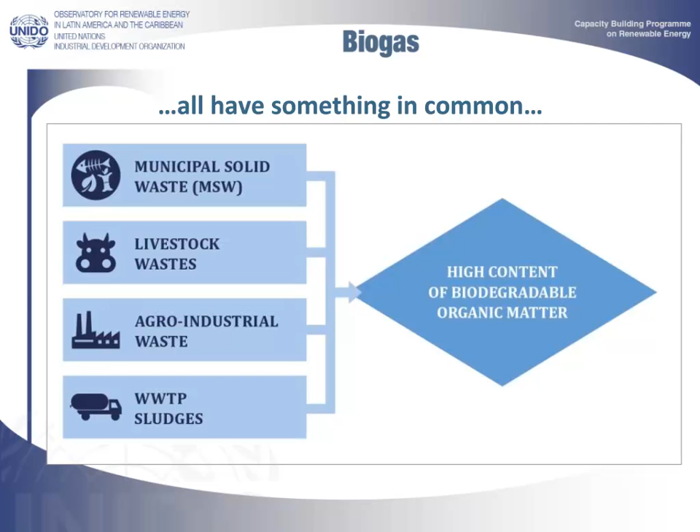The treatment of these wastes is accompanied by unavoidable costs, because there are regulations to be complied with. However, if the waste is treated considering criteria of minimizing energy consumption, energy production, nutrient use, and a reduction of greenhouse gas emissions, anaerobic treatment becomes very attractive.

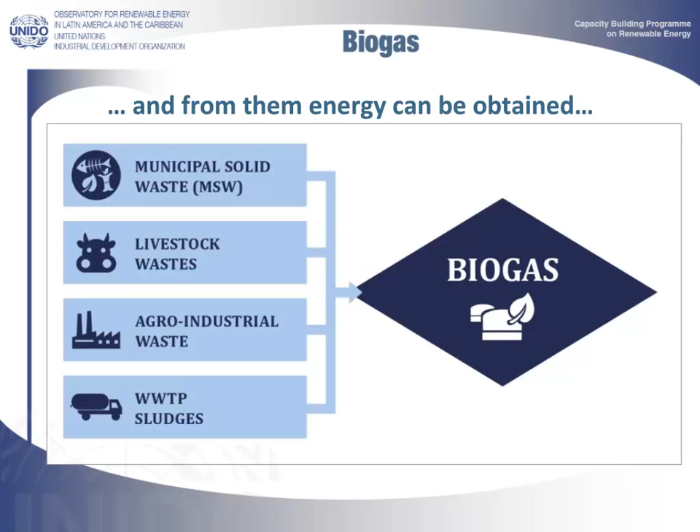The high concentration of organic matter in waste makes them highly suitable for use as feedstock in anaerobic processes for biogas production. Of course, the waste must be suitably managed, and there are well-known problems associated with this when wastes are not treated properly. There is also growing awareness that environmental precautions are essential for the future of our planet

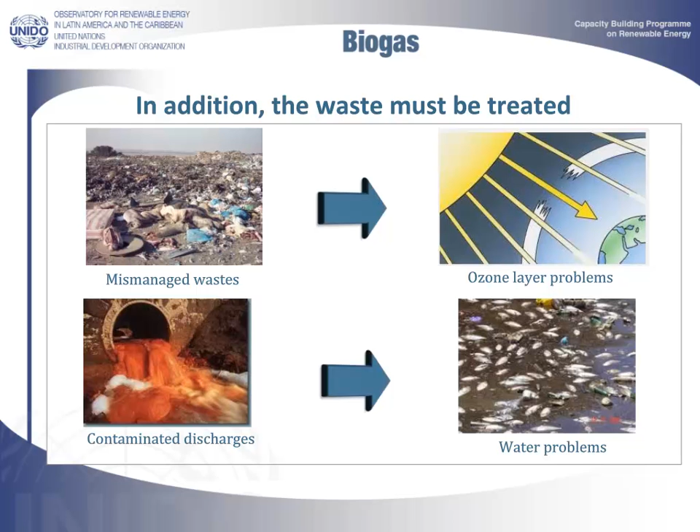and continued economic development. We now have technology that is able to decontaminate waste and at the same time produce energy. This is known as anaerobic digestion.

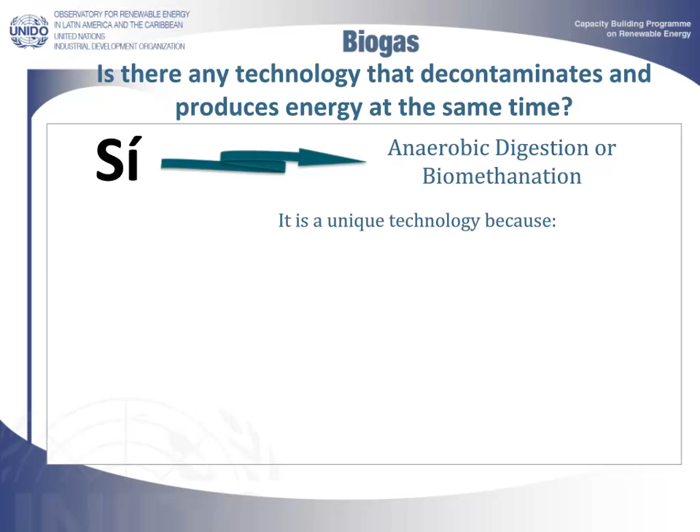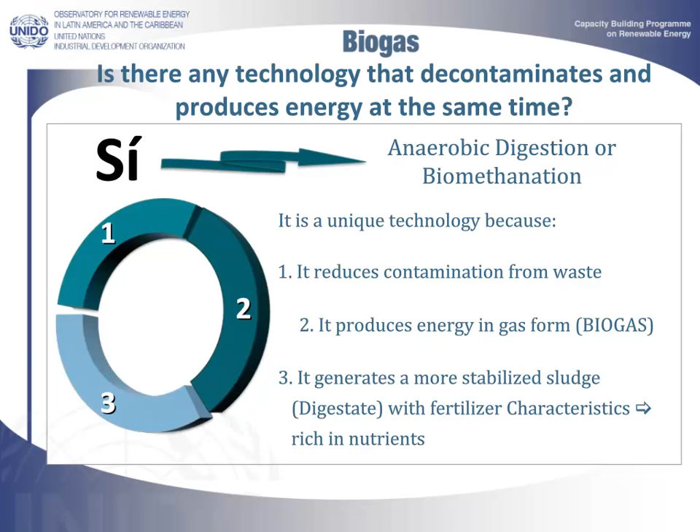Environmental aspects and the need for renewable energy have led this technology to be of huge interest in both developed and developing countries, since it offers both possibilities and solutions to global issues, such as safe, controlled waste management, energy production, and other collateral benefits.

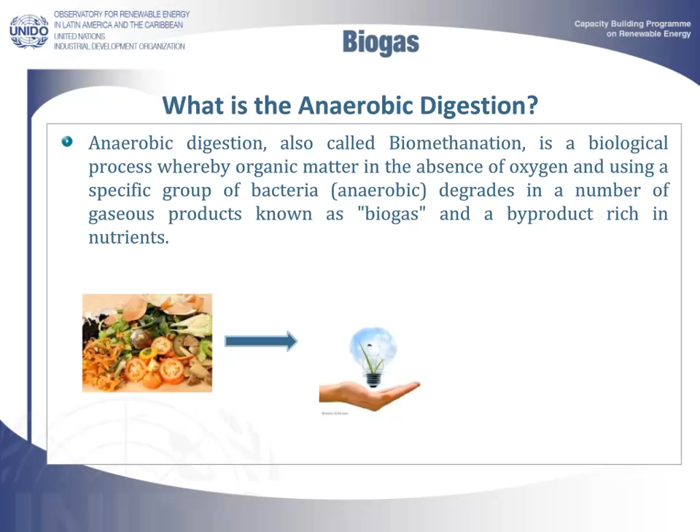Anaerobic digestion is a biological process in which a group of specific bacteria, anaerobic bacteria, transform organic matter into biogas and a nutrient-rich product known as a digestate, or biol, in some countries of Latin America and the Caribbean.

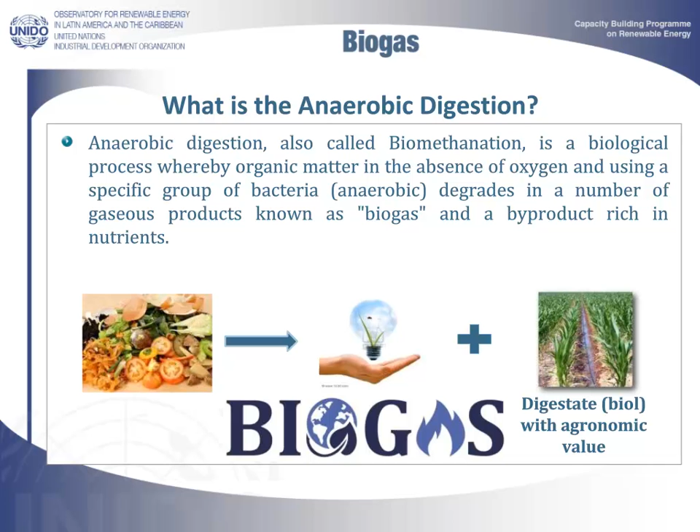There are different strategies for managing this digestate, and the appropriateness of one or the other will be governed by the characteristics of the environment, the objectives, and the scale of treatment.

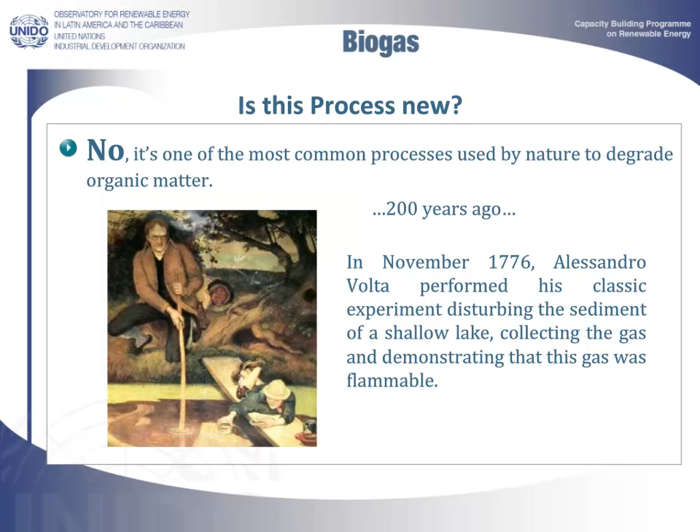Some authors have attributed the first scientific reference to biogas in 1630 to Jan Baptista van Helmont, who stated that a flammable gas could be obtained from the decomposition of organic matter. The scientific interest for energy purposes dates from 1776, when Alessandro Volta identified the relationship between organic matter decomposition in an anaerobic environment and the generation of a combustible gas.

Over the years, many researchers, among which are some of the most famous scientists in the world, have advanced our knowledge of the process, but it was only since the mid-20th century that more progress has been made, and today many of the reactions involved are now well known.

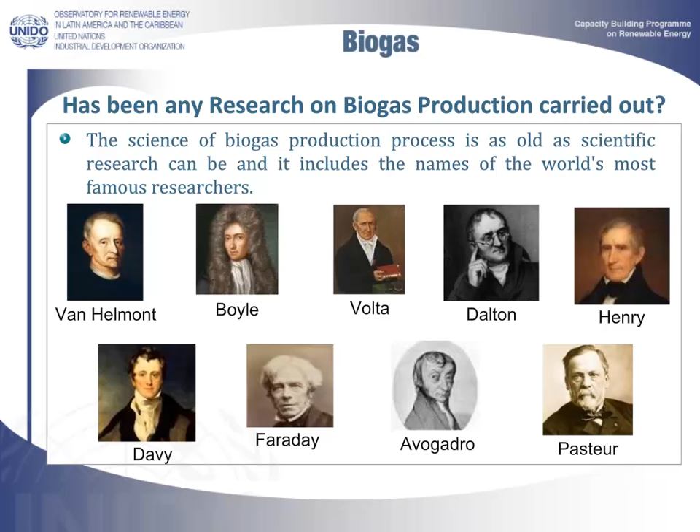Throughout history, there have been many events related to the evolution of research into biogas. In 1930, for example, with the discovery of anaerobic bacteria, there came the academic and scientific recognition of anaerobic digestion. However, subsequently, this interest began to wane owing to the increasing consumption of fossil fuels. It was from the oil crisis of 1973 when interest resurfaced.

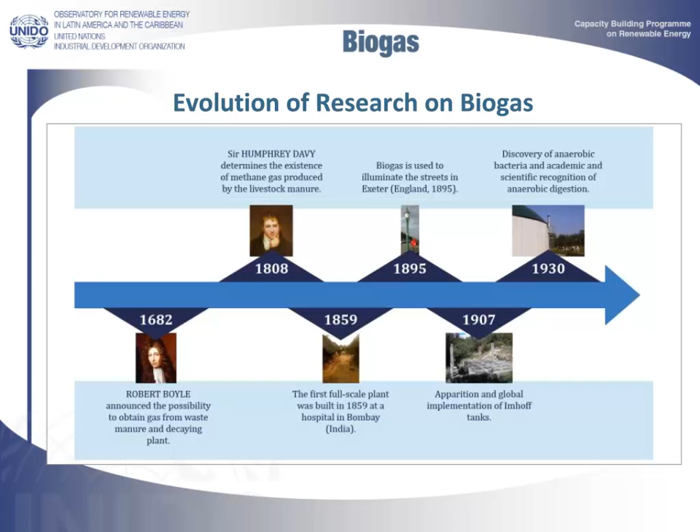Research and development programs were promoted and industrial plants were built. There are many reasons that justify biomethanation, among them energy production, scarce and strategically very important resources, and the great potential of biodegradable organic waste in the region of Latin America and the Caribbean. As I have mentioned, this is a markedly agro-industrial and livestock-oriented region.

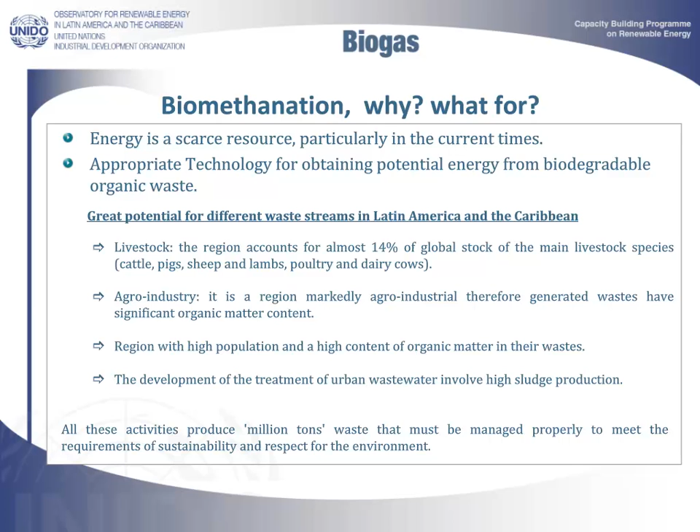All these activities generate millions of tons of waste that could be used to provide energy and at the same time meet the requirements of sustainability and environmental friendliness. Another fact to note is that biogas is a renewable source of energy and thus provides greater supply security. Its use also reduces emissions, contributing to the reduction of greenhouse gas emissions by avoiding methane. Finally, of course, it is a source of employment.

Biogas also provides greater energy and economic independence. The rising costs and limited availability of non-renewable energy sources, combined with the difficulty of distribution in rural areas, make the application of this technology particularly appropriate in these communities. Moreover, nationwide, it can help reduce the import of other energy sources.

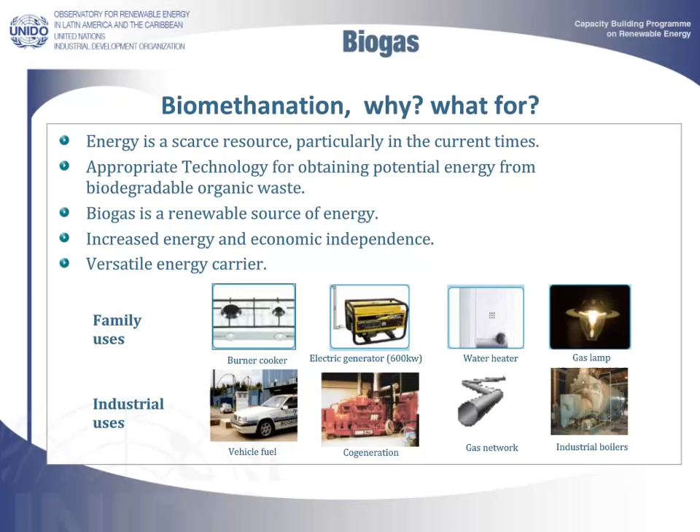Another fact to consider is the versatility of biogas, since it can be used in many energy applications. At family level, in rural areas of developing countries, it is used mainly in kitchens and lamps. On a large scale, its main applications are direct combustion for heat production and cogeneration engines producing electricity and heat. Other areas gaining increasing importance are its use as fuel in motor vehicles and its injection into the natural gas network.

Finally, we should note that organic waste has a natural microbiological activity due to its composition. This implies there are natural processes of decomposition, and inadequate control of its management allows gases, including greenhouse gases such as methane, to be emitted into the atmosphere. The application of anaerobic digestion is also effective for the appropriate reduction of greenhouse gas emissions.

Biogas has two origins. It can be produced in anaerobic digesters or naturally in sanitary landfills for municipal solid waste. Biogas generation in both digesters and landfills is a process of interest in the energy field. In both situations, there is significant environmental improvement to be gained, since the extraction of biogas from landfills reduces methane emissions, and the anaerobic digestion of waste reduces pollution.

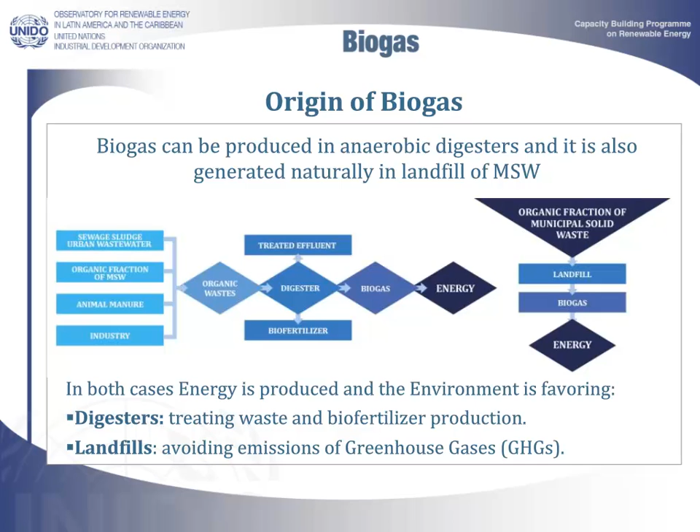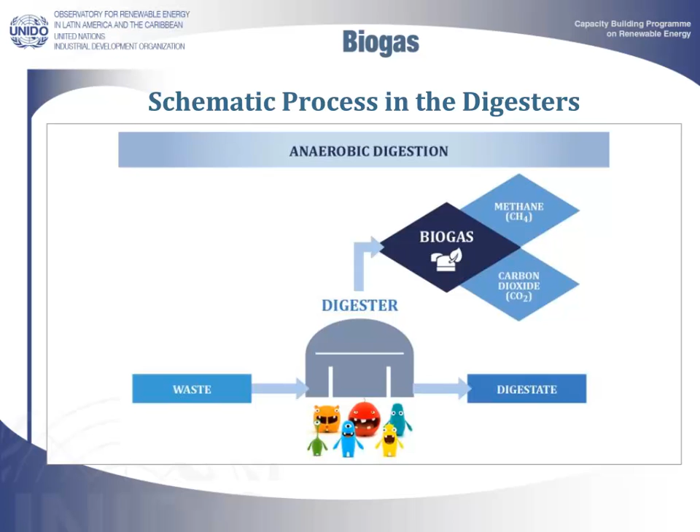This slide shows the schematics of the process that takes place in an anaerobic digestion plant. The organic waste enters a digester, and different microorganisms are able to transform it into a gas, composed mainly of methane and carbon dioxide, and digestate, which can be used as an organic amendment because it improves soil quality.

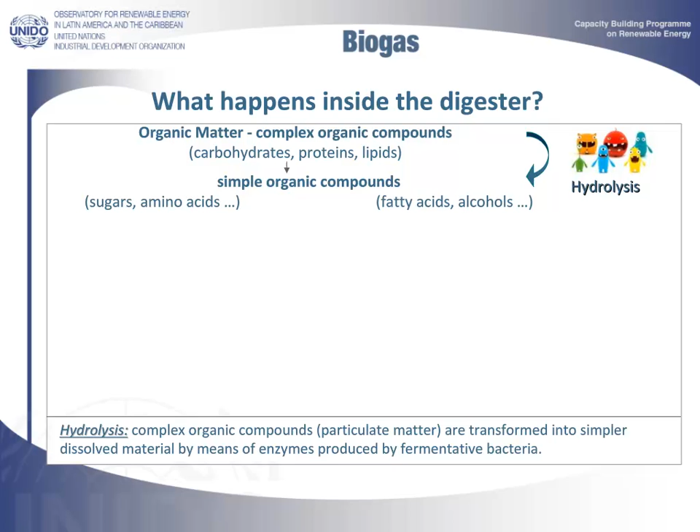Inside the digester, the organic matter is transformed by the action of different families of microorganisms. Biochemical and microbiological studies indicate that the anaerobic degradation process can be divided into 4 phases: hydrolysis, acidogenesis, acetogenesis, and methanogenesis. When the waste contains sulfates, small amounts of hydrogen sulfide can also be produced.

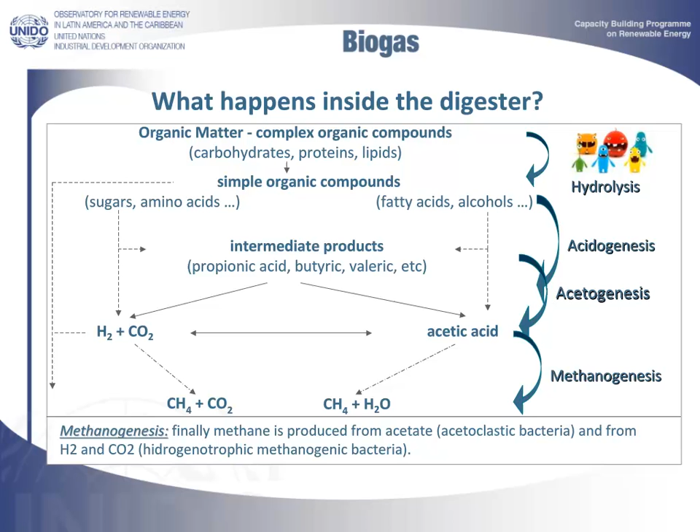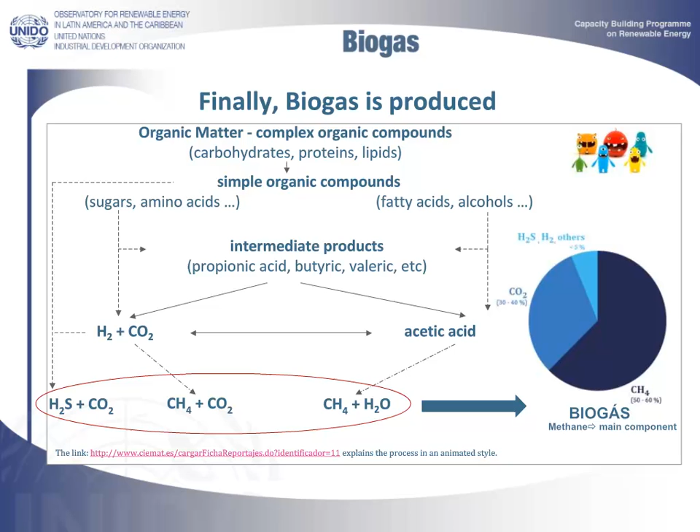Due to its biological origin, all the gas—methane, CO2, etc.—produced in the process is known as biogas. Biogas is constituted mainly of methane, between 50 and 60%, carbon dioxide, 30 to 40%, and other gases in small concentrations, lower than 5%. Biogas is a source of energy equivalent to other conventional sources.

The slide shows the equivalence of 1 cubic meter of biogas containing 65% methane with respect to traditional energy sources such as fuel alcohol, gasoline, natural gas, electricity, and wood and coal. In the case of electricity, we would of course have to factor in motor performance.

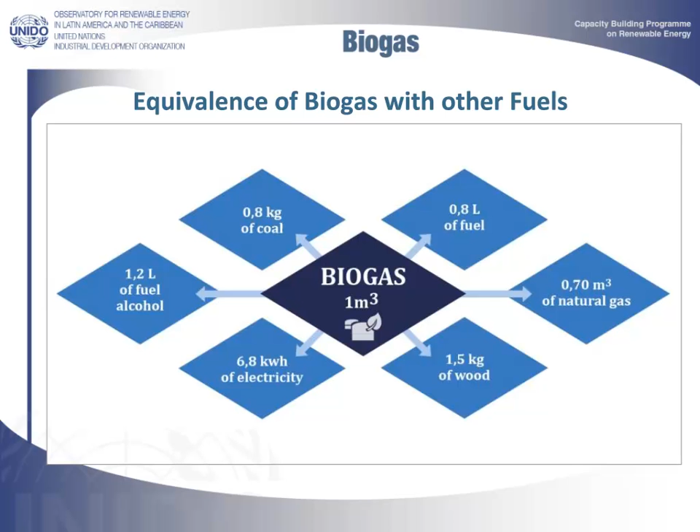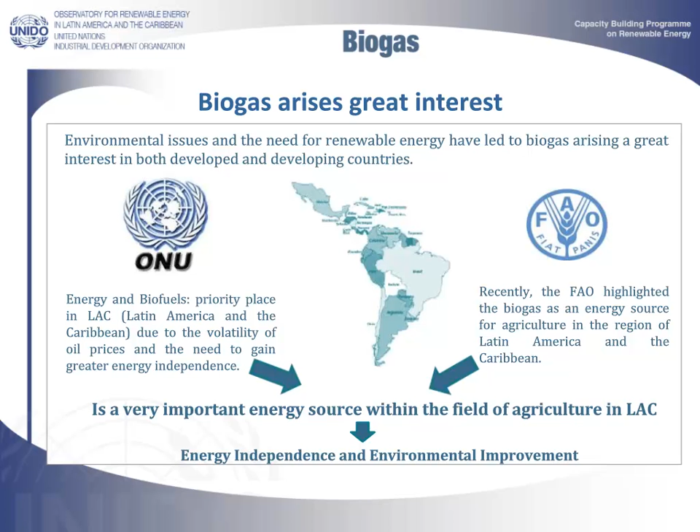The United Nations organization considers biogas as a very important renewable energy, especially in the region of Latin America and the Caribbean. It is claimed that biogas can boost the agricultural activities of small producers and reduce greenhouse gas emissions in these and other regions of the planet.

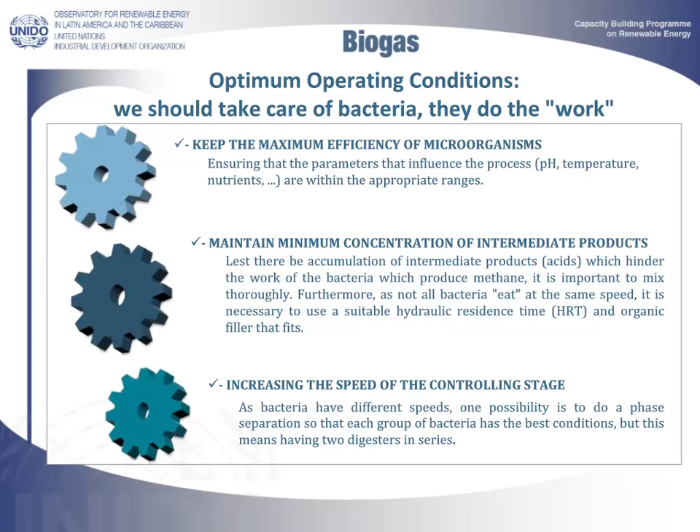Depending on the loading frequency, there can be batch, continuous, or semi-continuous digesters. In this case, the digester is fed discontinuously but steadily.

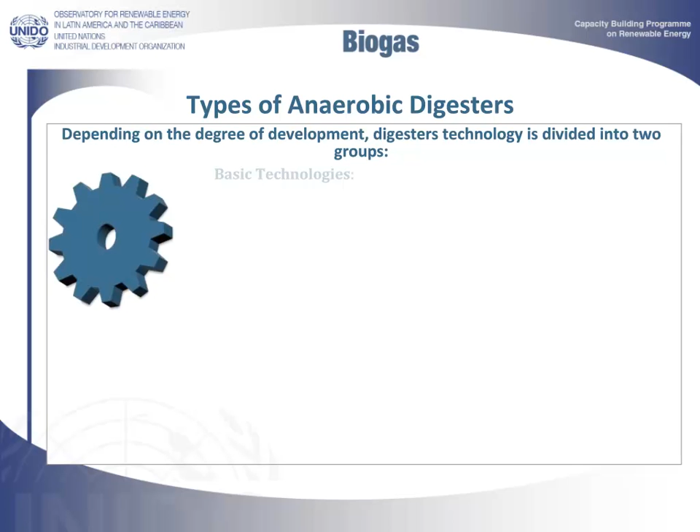Depending on the degree of development, digester technology can be divided into two groups. First, we have basic technologies; these refer to family digesters whose primary objective is to provide energy. But there are also advanced technologies, oriented to the agricultural and agro-industrial sectors at upper middle level, where the objective is to provide energy and resolve pollution problems.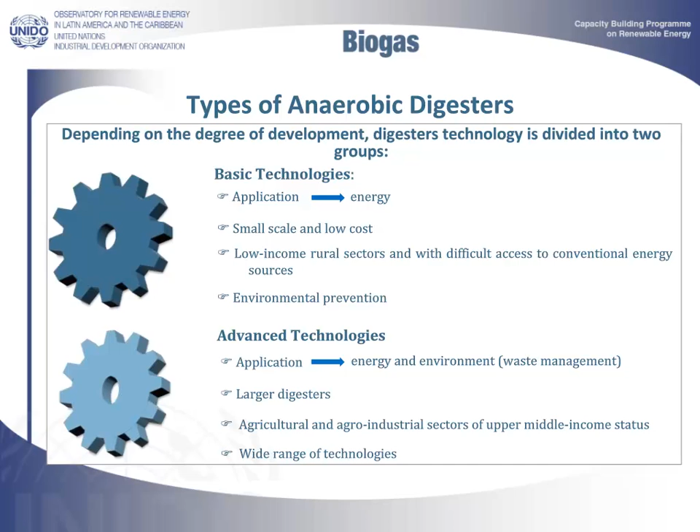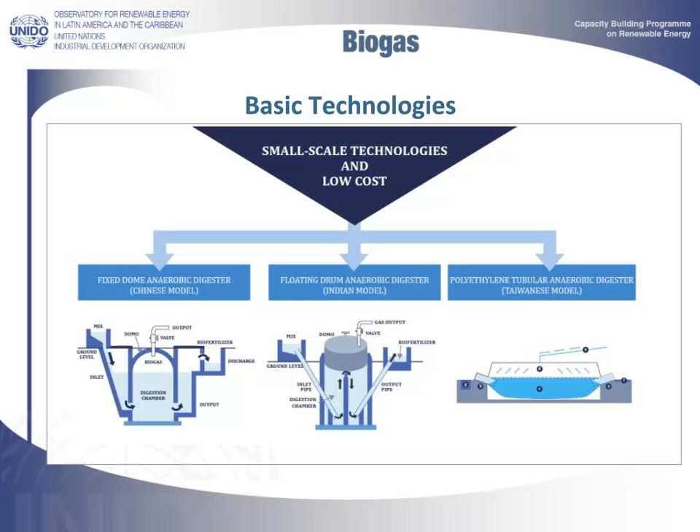Family-scale digesters are widespread in countries like China and India. The digesters most employed are, respectively, the fixed dome and the floating drum. However, the complexity of their construction and the relatively high cost compared to Taiwanese models have limited their implementation in other countries. The tubular plastic digester, a simple and inexpensive construction, allows further expansion of this technology.

These digesters operate in semi-continuous mode. A fixed amount of manure is mixed with a fixed amount of water, and the mixture is introduced into the digester once daily.

The global aim in the development of these digesters is to reduce costs and to increase the life of these facilities in order to reach the largest number of users of this technology.

Tubular polyethylene digesters are the type most frequently used in the Andean zone. They are made of plastic, are easy to build, and are economical. Experiments show that a digester 8 meters long can treat the waste of 55 pigs and produce up to 6 cubic meters of biogas per day.

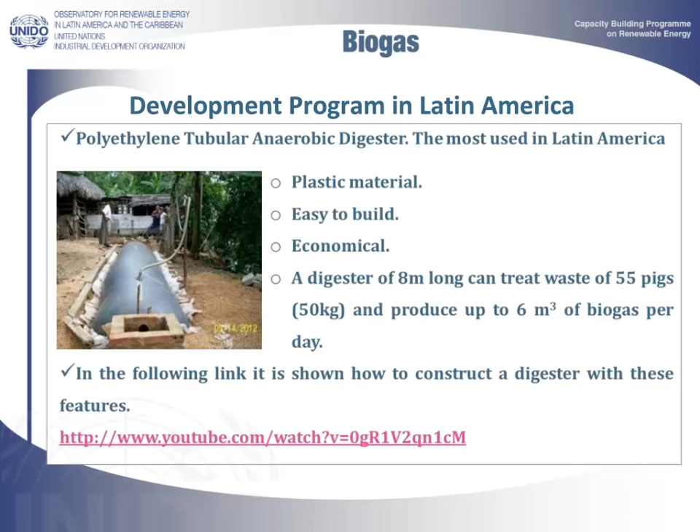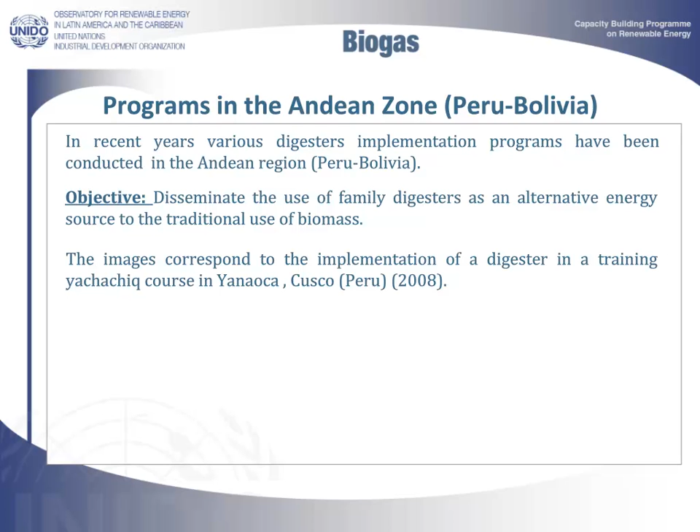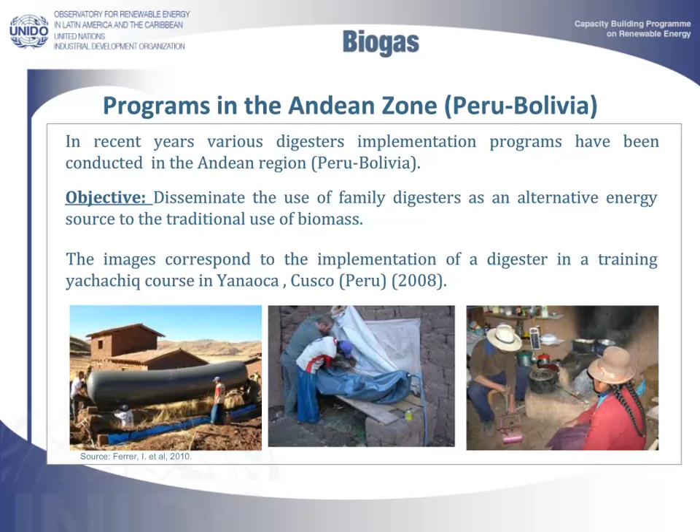In the Andean region, the majority of energy is consumed in the home, based on traditional biomass such as wood and dung, which involve serious health problems, especially in women, and also environmental problems. A program has been carried out in this area to promote the use of family digesters as an alternative energy source to the use of traditional biomass.

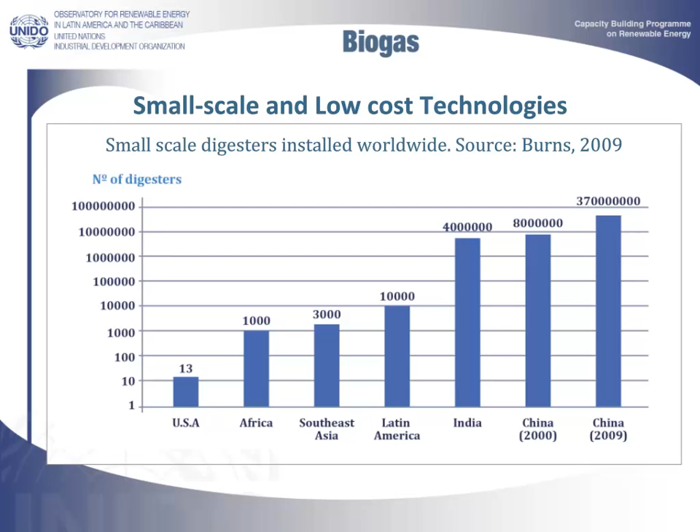After China and India, Latin America, with 10,000 digesters, is the region with the most small-scale, low-cost digesters. In recent years, important progress has been made in understanding the process, both as regards the microbiology involved and the parameters that regulate degradation. This has led to significant improvements in efficiency.

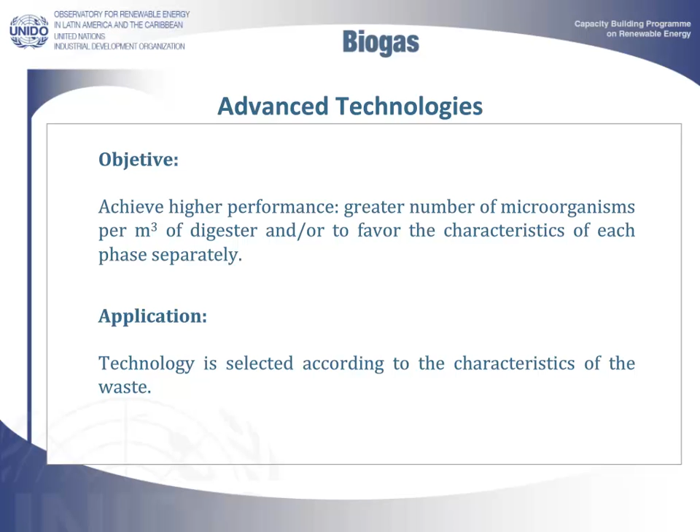The main objective of advanced technology digesters is to achieve maximum performance by treating waste efficiently and economically. Currently, many different technologies are available, and the choice depends mainly on the characteristics of the waste to be treated. These digesters are classified in 3 groups according to how the microorganisms are located in a digester.

Microorganisms can be present in suspended growth, attached growth on a carrier support, or they can be divided into two groups of bacteria, using two digesters, to favor the specific conditions of each group individually.

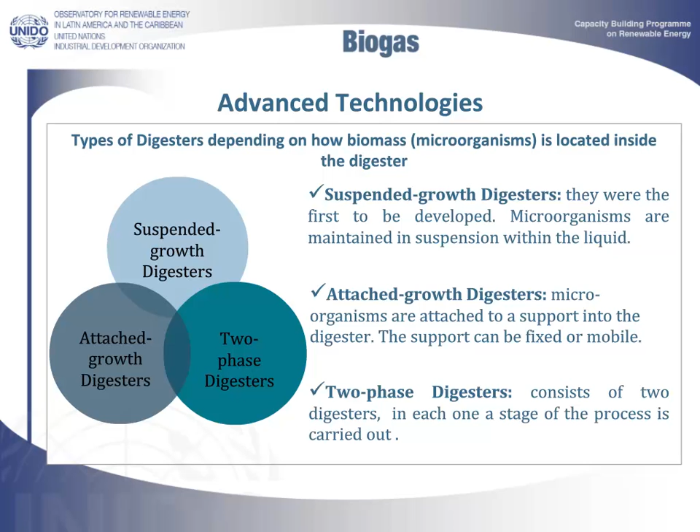Completely mixed digesters were the first to be developed. They are technically simple, with long hydraulic retention times of 15 to 30 days. They are mainly used for wastes with high concentrations of suspended solids, such as livestock waste and sewage sludge.

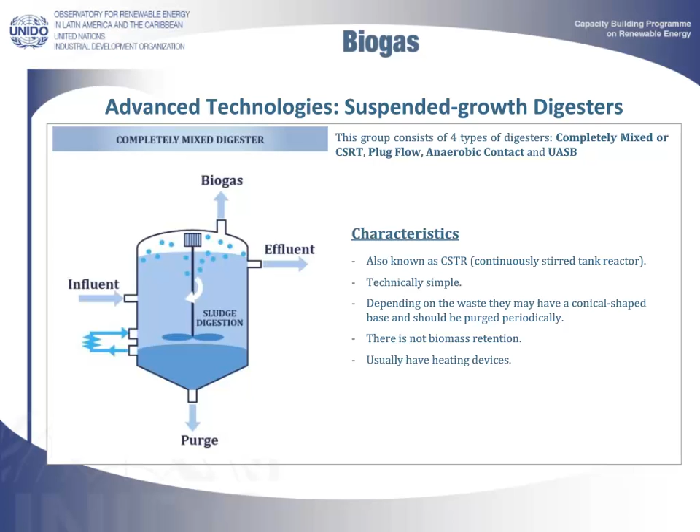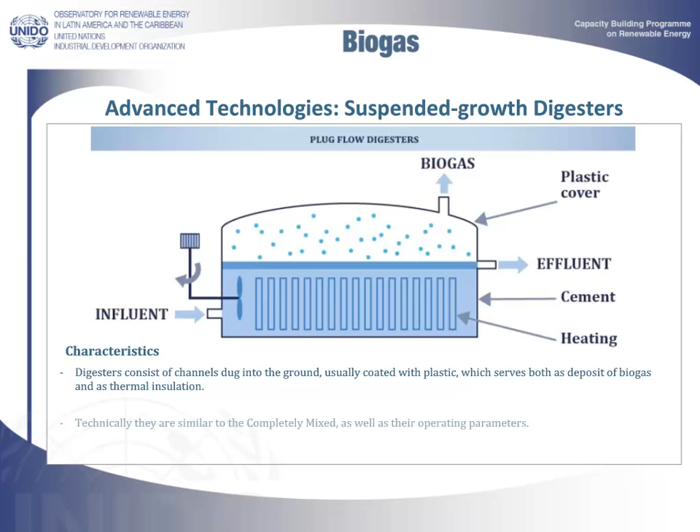Plug flow digesters are simple, with a long hydraulic retention time of 20 to 30 days. This type of digester is mainly used for livestock waste treatment.

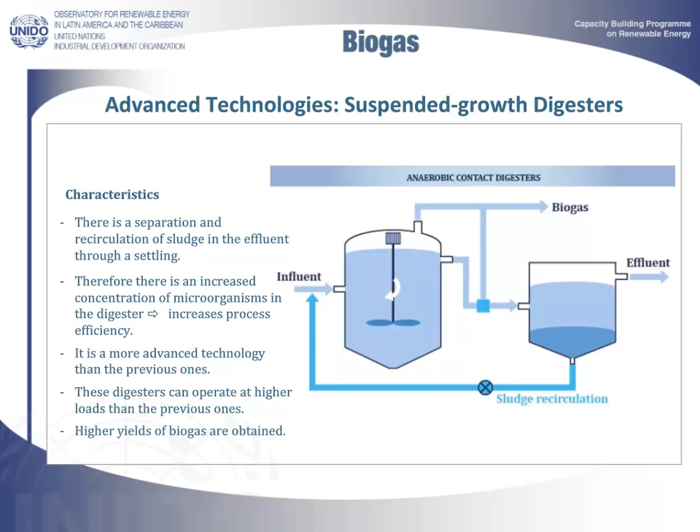Anaerobic contact digesters have shorter hydraulic retention times than the two previous digester types, between 2 and 6 days. They are mainly used for the treatment of agro-industrial wastewater, such as effluents from papermaking and sugar factories, among others.

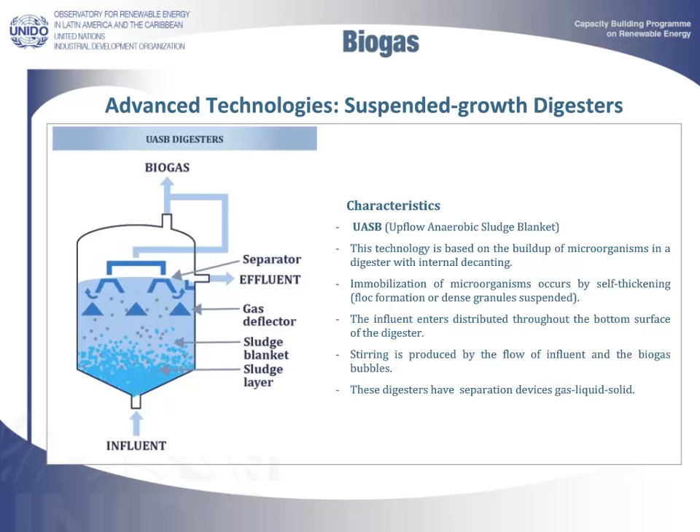In UASB digesters, the hydraulic retention time is 1 to 2 days. Greater volumetric loading rates can be achieved than with anaerobic contact digesters. They are also used for treating agro-industrial wastewater, such as from sugar factories, brewing, coffee, etc.

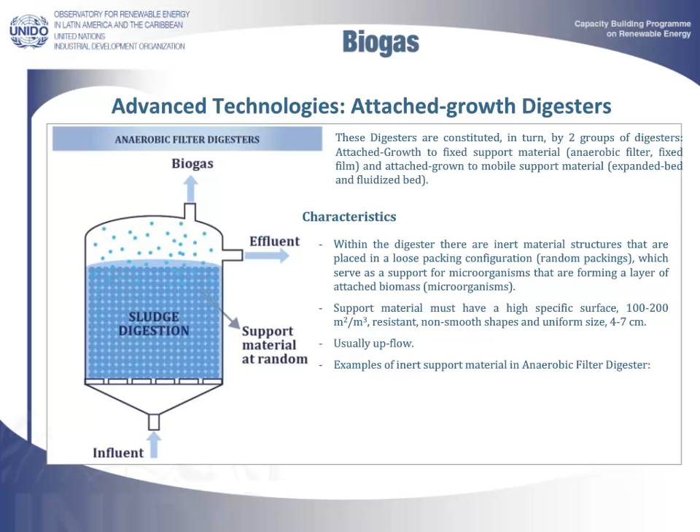Although very high volumetric loading rates cannot be achieved with them, anaerobic filter digesters are very stable. The hydraulic retention time is similar to UASB digesters, and they are also used for the treatment of agro-industrial wastewater.

Fixed film digesters have the same characteristics as anaerobic filter digesters. The main difference is that the inert support is placed in a set, non-random, packing configuration. Usually the direction of flow is downwards.

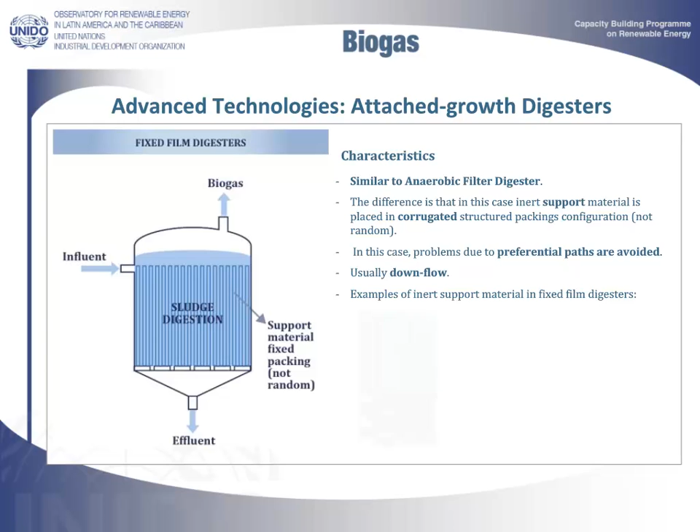The hydraulic retention time in expanded bed digesters is very low, just a few hours. These digesters are used for wastewater with low concentration of suspended solids. The unexpanded bed occupies about 10% of the digester volume. This type of digester is called an expanded bed digester when the resulting expansion of the bed is between 15 and 30%.

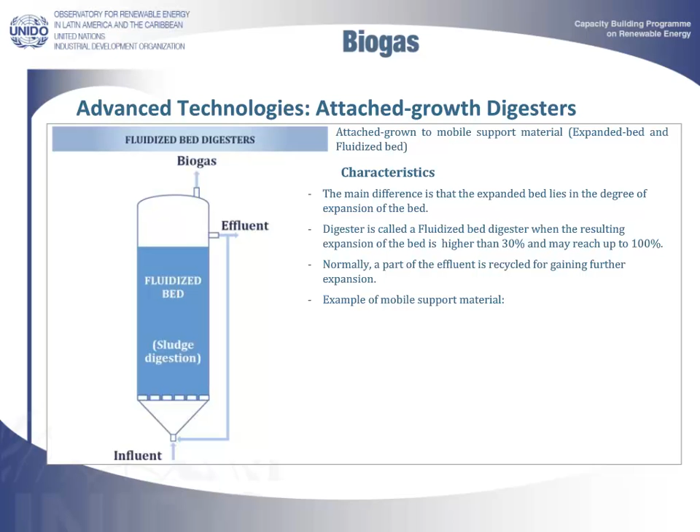Fluidized bed digesters are similar to expanded bed digesters, the main difference lying in the degree of expansion of the bed. In this case, it is higher than 30% and may reach 100%. To achieve this expansion, it is usually necessary to recirculate part of the effluent. These digesters are used with wastewater containing low concentrations of suspended solids.

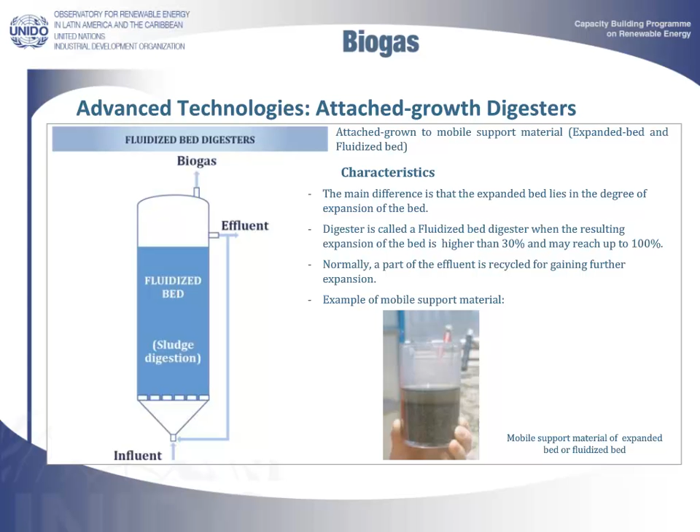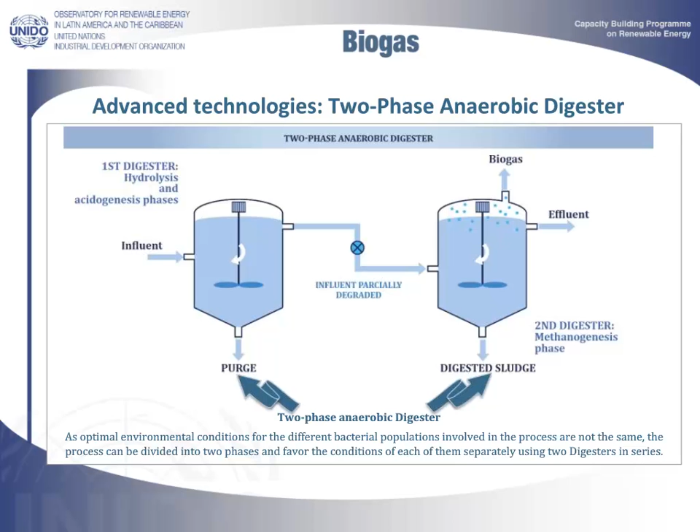As we have seen previously, the anaerobic digestion process takes place in several stages, each involving different kinds of microorganisms with different metabolic properties. The latest advanced anaerobic digestion technologies seek to separate the phases and optimize them individually. Two-phase digesters consist of two digesters, and each one carries out one part of the fermentation process.

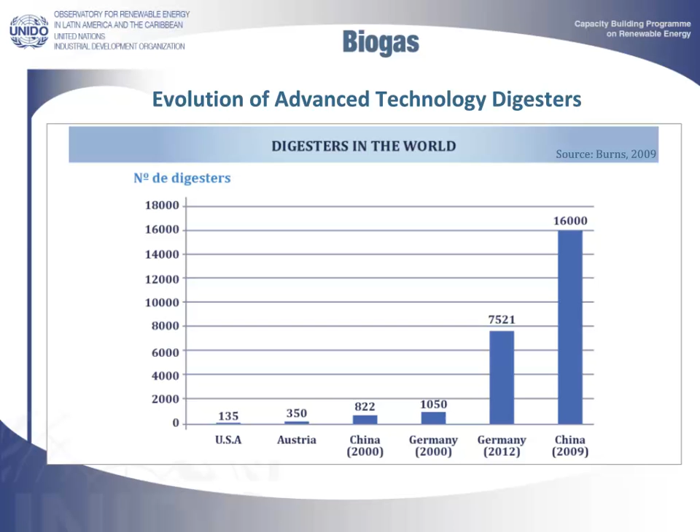In both China and Germany, recently built advanced technology anaerobic digestion plants have undergone significant growth. Official data provided by the Fachverband Biogas, FvB, the original name of the German Biogas Association, confirm the important development in recent years of this technology in Germany.

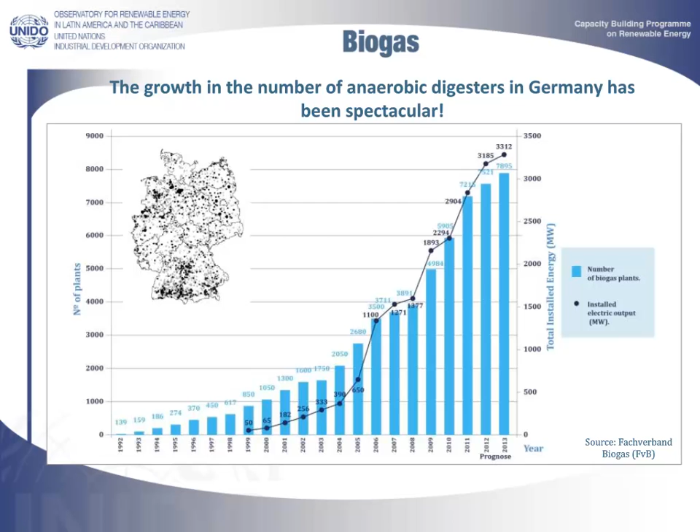The FvB notes that in 2011 more than 1,310 new plants came into operation, equivalent to 610 megawatts. The trend has not slowed, and it is estimated that by the end of this year there could be a total of 7,895 facilities generating 3,312 megawatts. In Latin America and the Caribbean, anaerobic digestion plants are now being used for important projects, not only from an environmental perspective, but also from the point of view of energy.

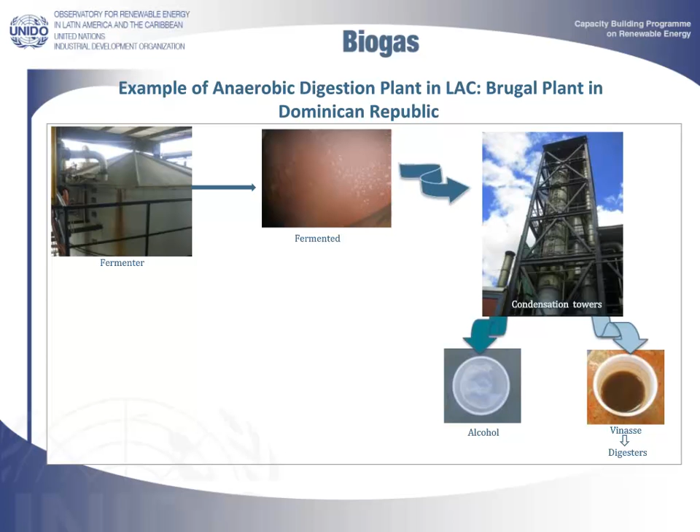Such is the case of the anaerobic digestion plant that Brugal has set up in San Pedro de Macorís, in the Dominican Republic, to treat the stillage generated in the distillery.

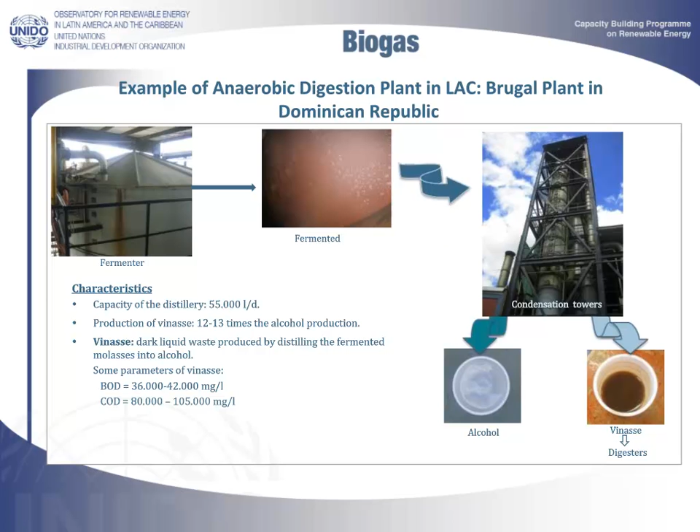The stillage is treated by two anaerobic filter digesters with a capacity of 1.93 million gallons. 75% of the volume of the digesters is occupied by a PVC plastic support. The digester is designed to produce 24,000 cubic feet per hour of biogas with an average feed of 28 cubic meters per hour.

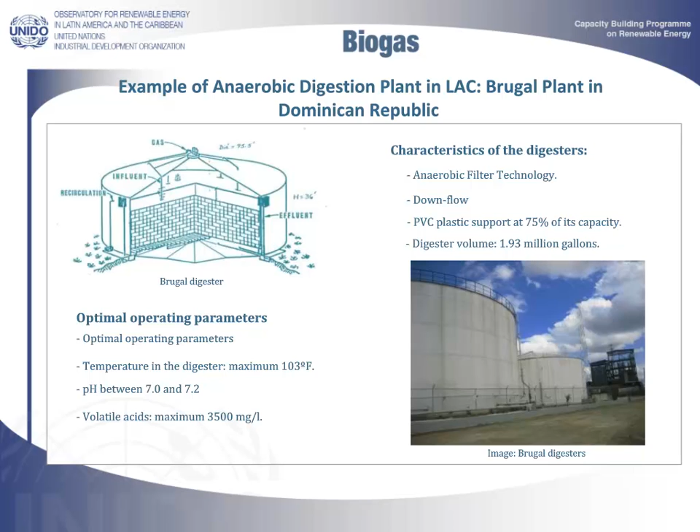The biogas produced is consumed in one of the two existing boilers, achieving a considerable saving of fuel. Plant data show that anaerobic digestion is an established technology that can yield environmental and economic benefits through biogas production.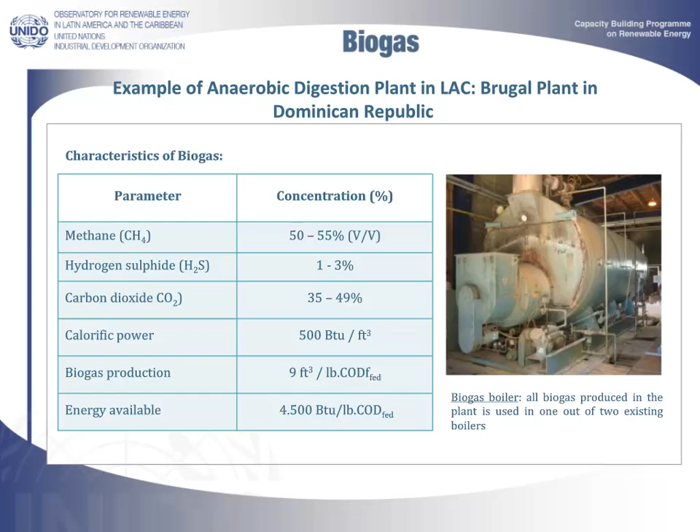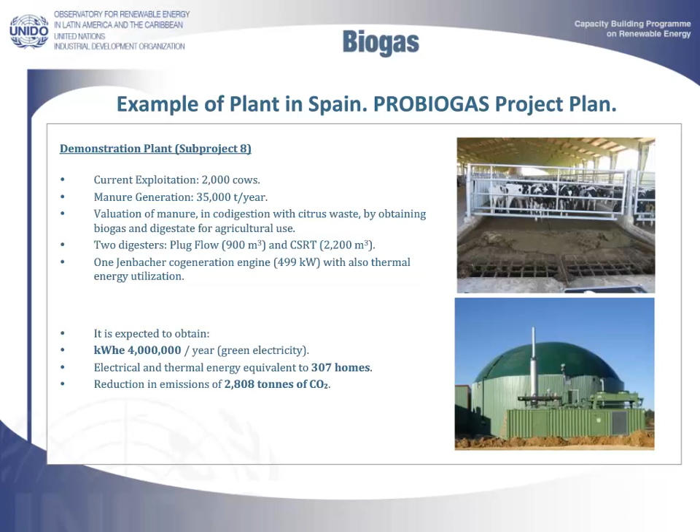The project known as PROBIOGAS is an unusual strategic project including a collection of interrelated scientific and technological activities with a common aim. This is to develop sustainable systems for producing and using biogas in agro-industrial environments, as well as demonstrating its viability and promoting it in Spain. In total, 15 research and development centers and 16 Spanish companies and organizations have participated in the PROBIOGAS project. The project is backed by the Ministry of Science and Innovation through its aid program for unique and strategic projects.

As discussed above, biogas is also produced in solid waste landfills. In a sanitary landfill, as they are known, municipal waste is discharged on the ground and spread out, forming thin layers. Then the waste is compacted to reduce its volume and covered with suitable materials to minimize the risk of environmental pollution and to promote the biological transformation of fermentable materials.

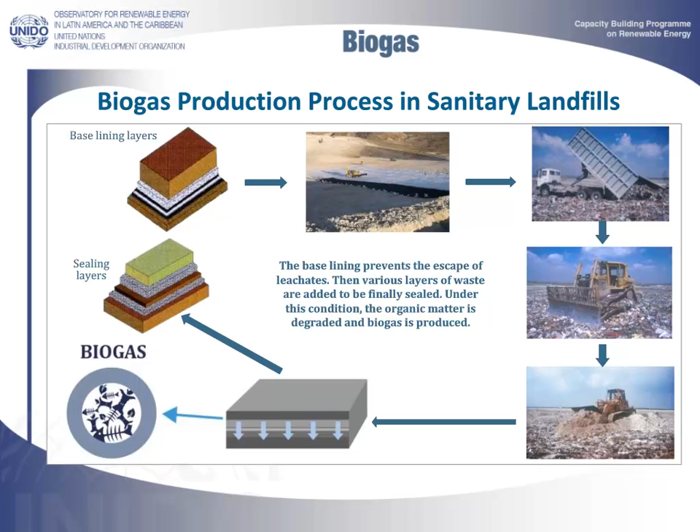When a landfill has completed its waste capacity, it must be sealed. It is in these conditions that the biological degradation of the waste organic matter and biogas generation occur. To prevent leaching in landfills from affecting the soil, groundwater and surface water, the base lining has impermeable barriers and adequate drainage layers. Also, once the landfill has been closed, it is sealed with different layers in order to avoid the emission of gases to the atmosphere and the entrance of water into the installation.

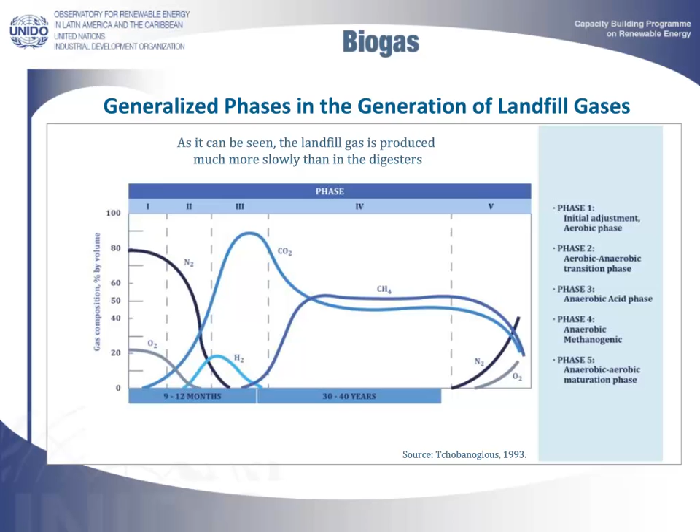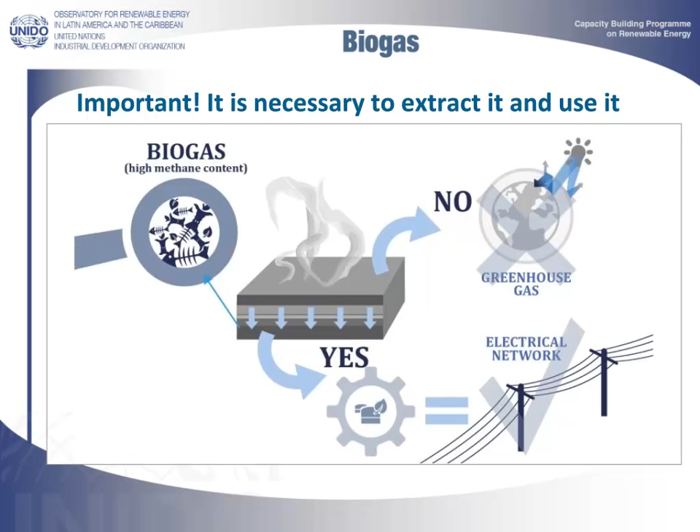The biogas production process in a sanitary landfill occurs slowly and takes place in 5 phases. Methane formation starts in the 3rd phase and reaches its maximum in the 4th phase, approximately 2 years after the discharge of the waste. The extraction of biogas is considered necessary from the environmental point of view to avoid the emission of greenhouse gases such as methane into the atmosphere, and also from the energy point of view, since it can offer a significant energy potential.

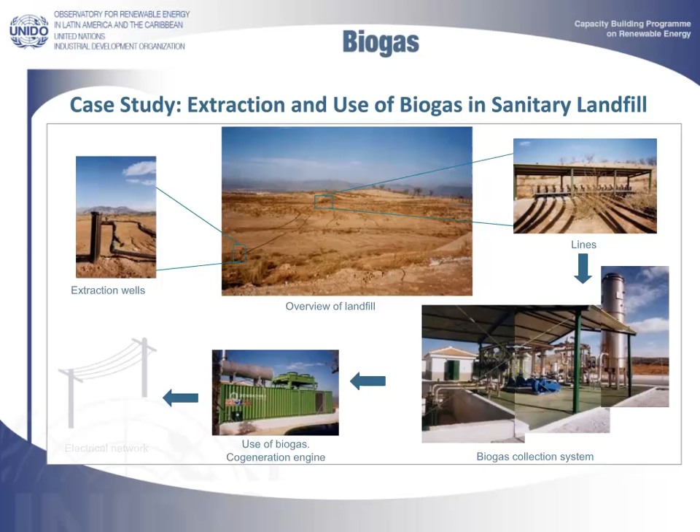An installation designed for the extraction and utilization of landfill biogas consists mainly of wells, pipes, valves, control and monitoring equipment, pumps, and flame exhausts. The slide shows a Spanish landfill gas plant. Here we see a diagram with the main elements responsible for the capture and recovery of landfill gas in a large sanitary landfill.

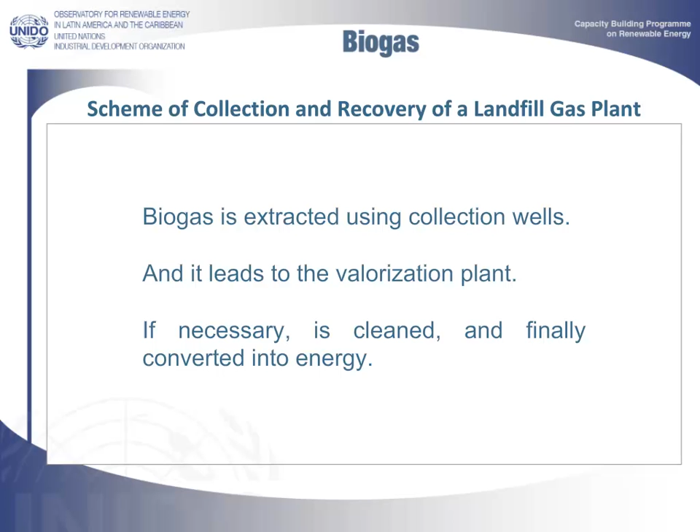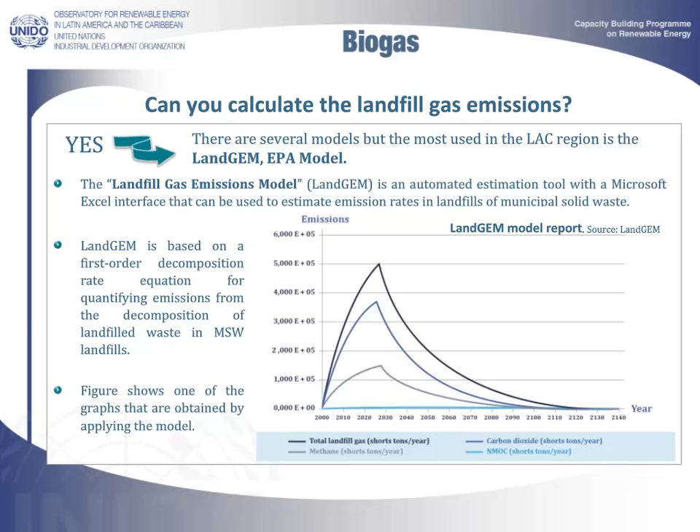During the past 30 years, several models have been advanced to estimate biogas production. Of these, the most widely used in the Latin American and Caribbean region is the LandGEM from the United States Environmental Protection Agency. This has made versions adapted to the characteristics of some countries in this region, such as Ecuador, Colombia, Mexico, and Central America. The model is based on a first-order equation which estimates the amount of biogas and the constituent gases produced in the landfill. The figure shows one of the graphs obtained with the model.

The main function of landfill bioreactors is to accelerate the degradation of organic matter. Biogas will be produced at a higher rate than in traditional landfills. Settlement will also be greater. The percentage of methane will increase, and the greenhouse effect and the presence of toxic gases will be reduced. This implies higher profitability, less environmental damage, and a reduction of costs in post-sealing maintenance.

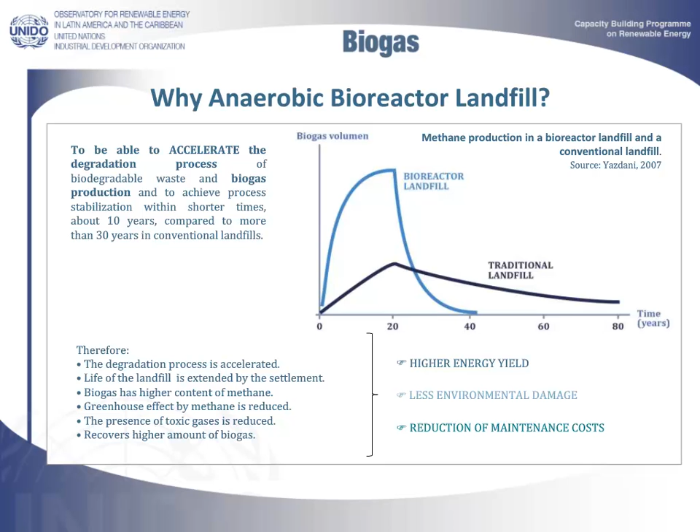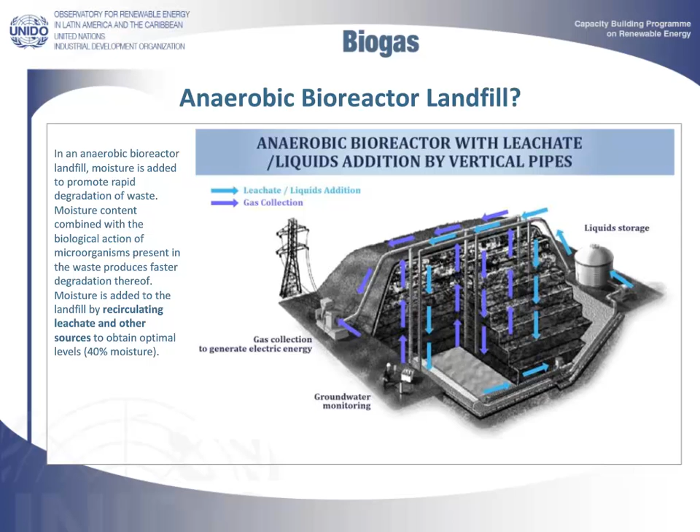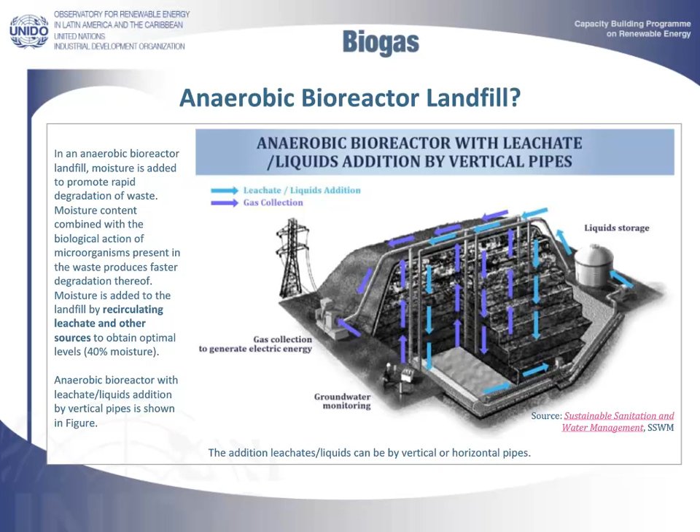The moisture content is the most important factor because it promotes rapid degradation. Bioreactor technology is based on maintaining optimum moisture levels, approximately between 35 and 65% relative humidity, by the addition of liquids, usually a leachate. The addition of leachate or liquids is accomplished with pipes, which may be positioned either vertically or horizontally. As we saw above, one consequence is that the bioreactor produces more biogas in a shorter period of time than conventional landfills.

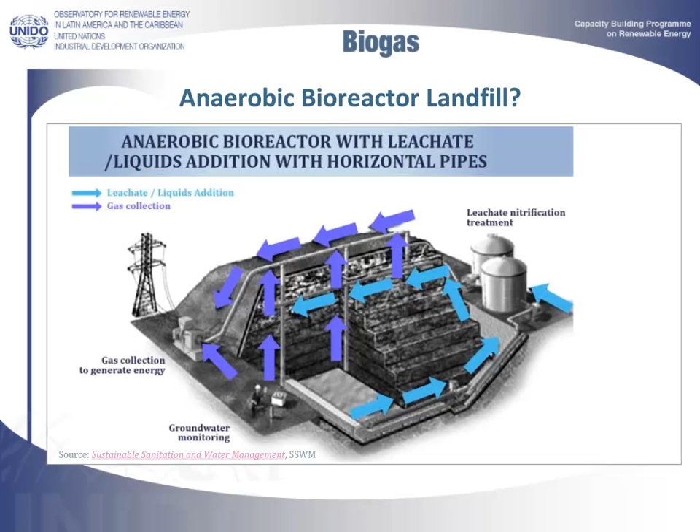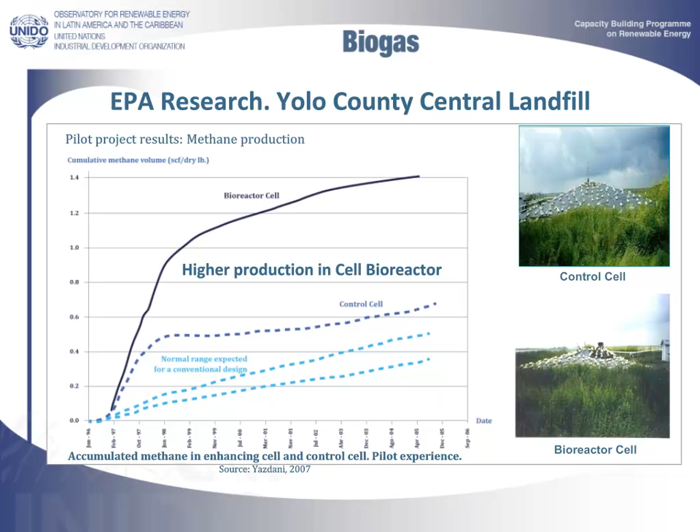This last figure shows the results obtained after several years of research conducted in 2 pilot cells in Yolo County Central Landfill in the United States, one a control and the other a bioreactor. As you can see, there is a much higher methane production in the bioreactor cell than in the control cell. This is corroborated in the attached images, where a higher settling rate in the bioreactor cell can be observed. The good results achieved in the pilot testing have led to a demonstration plant.